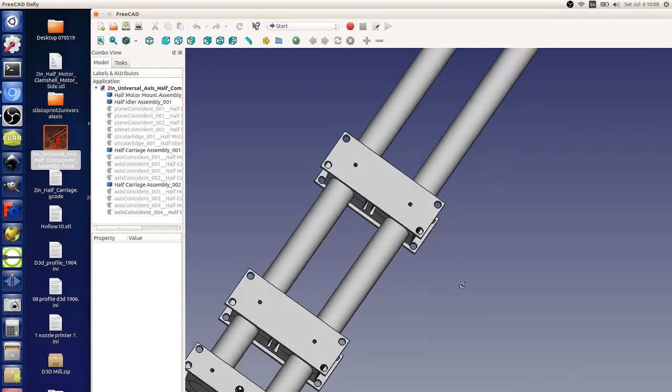Opening that up. Aiden, briefly, how do you download this? Is that what we are looking at, or does it have more? There's more, that's just one component. I think you can click on the whole assembly - looks like you've hidden some of it.

Hang on, let me take over for a second. That's funny, I saw the whole thing before. Maybe I don't - oh, that's a file, maybe I downloaded it earlier. Can I just hide this? Okay, so this is just one axis, right?

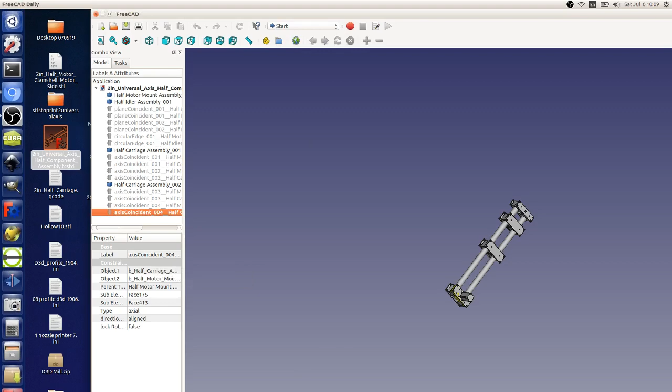So the first thing to do is go to FreeCAD, Tools, Add-on Manager, Workbenches. A2plus, it's right there at the top - it was the second one. Install that. This is essential because this is how I made this.

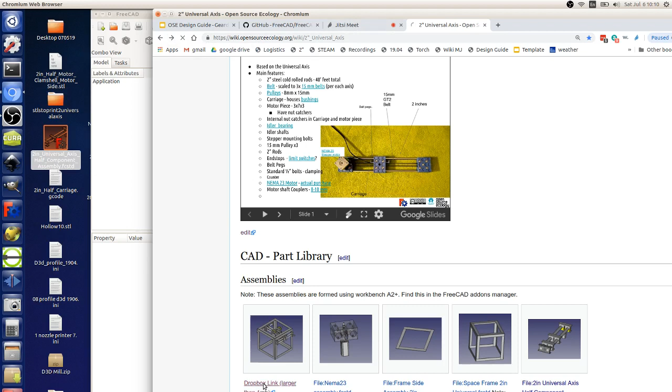And while that's installing, if you go to the 2-inch axis page, you're going to get a link to this Dropbox folder. This is just because I don't have GitHub and this file is larger than 1 megabyte. So you click the Dropbox link, and there's a compressed zip folder. My recommendation - it shows up as a folder, but it's a compressed zip folder, so just direct download, top right.

So then we've already got that on our desktop. But here we've extracted it. I don't think it's that - no, this is, okay, delete, this is just delete. Anyway, trash it.

This folder contains all of the assemblies, sub-assemblies, and individual parts. So anytime I made an assembly, I wrote 'assembly' at the end of the file name. So this 2-inch universal axis half component assembly is actually our y-axis. I know my naming scheme is really bad.

Let me view it as a list. There we go. So if you organize this folder by date modified, the very top one is the mill assembly, and that's going to be everything. This is the y-axis - open it up - z-axis, and then this is the x-axis right here. And if you open up the mill assembly file, it'll take a moment to load.

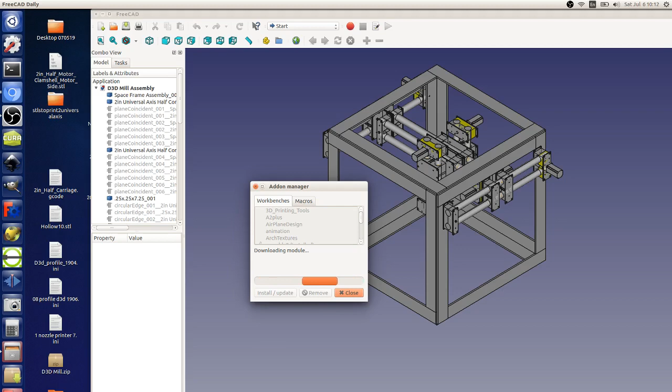Because the best thing for me to do is to show you how to actually edit these, and you have to use this toolbar. So it's still installing the bench, I guess. It's downloading, I don't know, it's slow.

For which reasons, the typical thing that we do when we upload files to the wiki - we have the full file and then we strip everything we can while still making it look the same, or just draw a very basic shape from scratch and resave that.

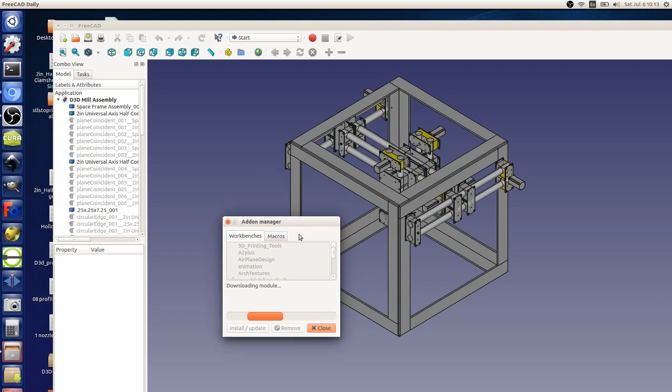I would go into each one - create simple, just create a simple copy from the part workbench? No, you could actually, in order to have it work - for example, we did the D3D CNC circuit mill not using the full parts, since each of them is like a meg, so you end up with a 50 meg file. We're just using like a 5K file that's super simplified, like 10 to 20K.

I saw that, but then I wasn't really able to use it - it wasn't useful to me when I looked at it. It was kind of useful, but not really. But if you look in this folder, your file sizes are not large. Can you add columns?

There's size, here we go. Your file sizes are not that large. The assembly files are large, but the individual files, like this motor pulley assembly, are not that big.

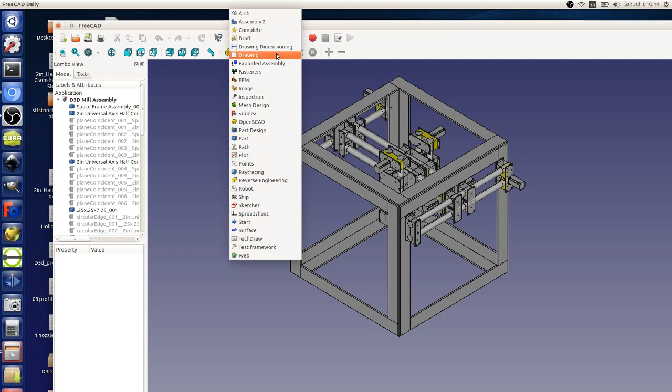Anytime you have a... the 2-inch carriage, which has all that complicated geometry, is only 350 kilobytes. So anyway, let me just cancel this real quick. But what you would do, there's going to be a workbench and a toolbar up here, and you can click this.

You can click any one of these, and then click up on your A2 Plus workbench. It'll say edit this component, and open up this subassembly, and within that you can edit those components. This is a subassembly, this is a subassembly, this is a subassembly — it's really cool.

Eventually you'll be left with a single part, and you can modify your part, save that, go back into the assembly or A2 Plus workbench, click update parts, and save your subassemblies in a linear fashion, and eventually you'll get back to here and this will update as well.

That's really good. And this has got basic detail. If we want absolute full detail for certain purposes... this is full detail — no it isn't, it doesn't have every single thing, it's not perforated. It's not full detail. You're always dealing with some form of abstraction.

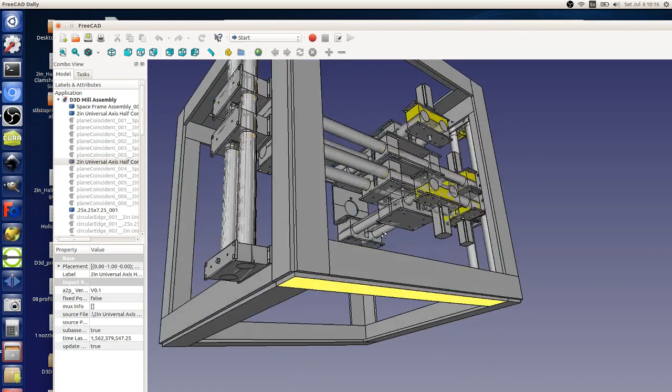Like if you added a single belt here that's a real belt, this would blow up a few more meg. So the idea is if you want to work really fast, like right now this is nice and workable, but that's because it's only a few meg. If you keep adding detail for actual accuracy, at a certain point you will explode.

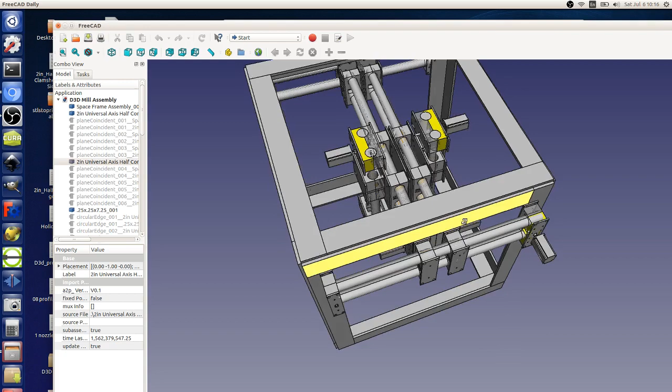So if you still want to work with complete assemblies, you would simply — and I like the workflow in the new assembly workbench — substitute a part that's just a lower resolution, less detailed version, and you can still see how everything fits together. It's an advanced version of the current workflow we have, where right now we're simply merging, which is a lowbrow way to do what's happening here, which is automated.

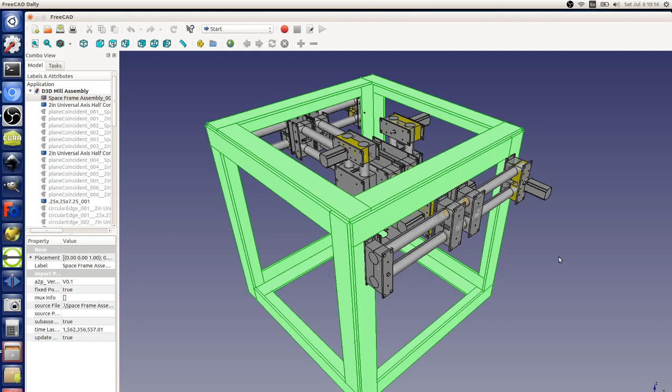But then can you do constraints, like how do you make... No, you can't do that in there, we're avoiding that. You're positioning it in space, right? We're positioning in space, that's pretty slow.

Once again, going to the idea of crowd design — the theory being you can get more people doing that, because right now you have to have the skills of assembly, whereas before you need no skills, you're just moving things around, easy, you just click two lines. But if you talk about taking people off the street to do this and teach them really fast — yes, of course, that's further lessons, but as an initial lesson you can even do this.

My takeaway from this experience was that people without much experience in CAD, when they create CAD files, it becomes very difficult to modify downstream. What I end up doing is redrawing them, because you don't have basic sketches, you don't have a good starting point, so you don't have a good foundation. So when you work with things like booleans, it's actually a lot more difficult to make changes down the line.

Yeah, but the answer is always 'and' — say the less skilled people would be making their designs not in an assembly format, and then a person can take that file and use it in the full assembly. So a lot of people can make individual parts collaboratively, but in the individual parts there has to be an emphasis on designing for modifications later. Of course, every single one of these workbenches allows that — files I had to modify later, yeah, of course.

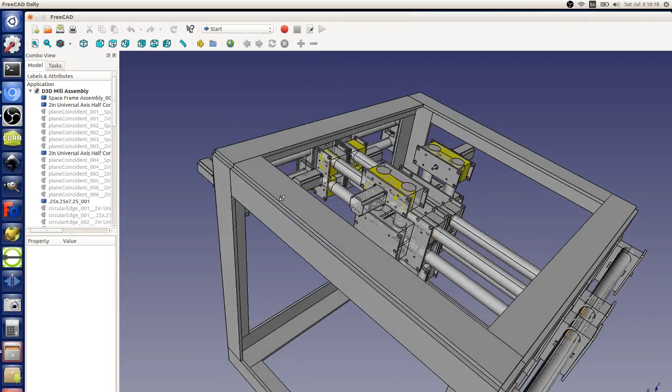So I'm assuming you would only be welding those — the weld seam doesn't matter much on one side. They beveled it so they've got good penetration. I mean, I can have them on the other side, but we don't really have the time. We can touch that up later.

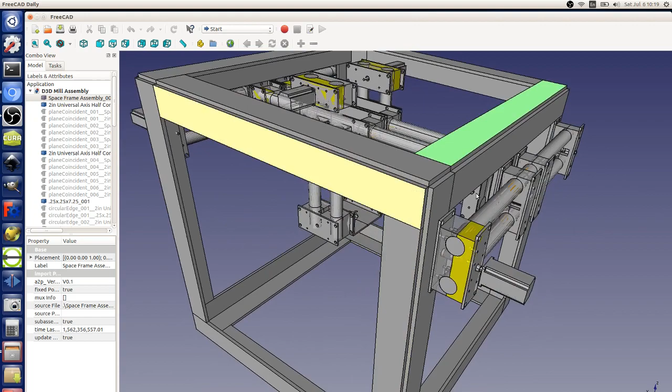So we're okay with that, because at the end of the day tomorrow, we don't have time to do all of that, so we do what we can. Right now we're actually welding the sides, we've got 3 sides welded, and then we assemble it all into one piece. The limit right now is printers, so let's get to that — what else do we need to coordinate?

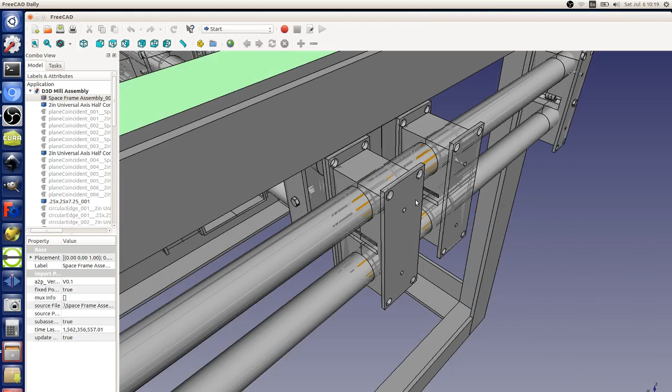We need to make these metal plates. So we've got metal-plastic composites - each of our 3D printed pieces has plastic for the 3D geometry and then metal around that. So for making the metal plates, do we have a good way to do that?

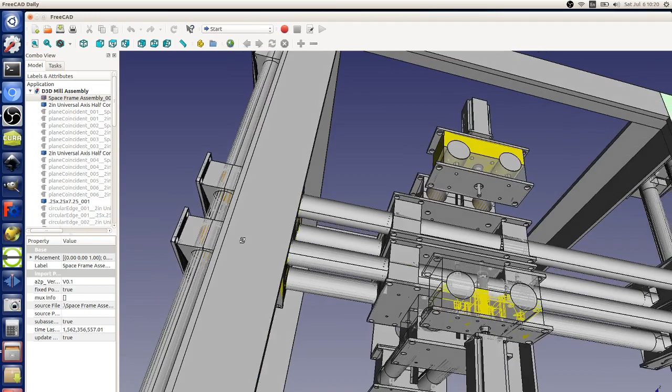The way I would do that is start with the nearest size stock that we have. If it needs to get cut, you cut it after you do the center holes. So what I would do is cut them to length. If the width needs to get modified, we'll do that later.

You mark out the hole pattern using a center drill on a mill. So let's say you have 6 plates to do and they're all the same pattern - you do all 6 plates one hole, then move your mill to the next hole and center drill that next hole on all 6 plates.

You do one at a time instead. In a mill vise, you can take a part out, put it back in, and make it true within 5 thousandths, more or less. So you can do one hole on all 6 plates, just marked with a center drill, not the real drilling operation.

Then you have somebody take those center-drilled plates and drill them out on a drill press. That way you can have all of these being made in parallel. The bottleneck is the person that's center drilling. But this gives you...

What's the center drill do? How do you register that on a drill press? The center drill is only on the mill - it's just for marking the center of the hole instead of punching. You can have people lay these out and punch holes, or you use the DRO as your measurement device.